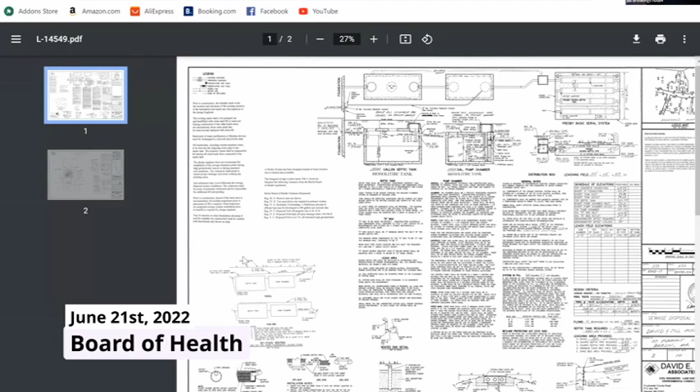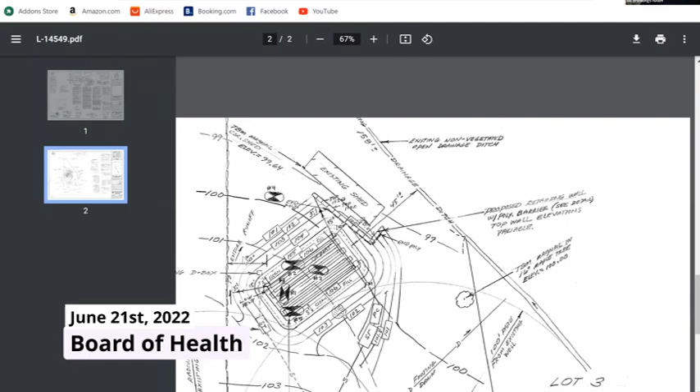So Sue, I think you've got the sheet. It's on the one shown. If you show sheet 2 of 2, we'll actually show the site. Oh yeah, there we go. Yeah, so 20 feet is proposed to the property line versus the 25 the local regs require, and 10 is the state's minimum offset.

Like another offset distance, leach area and tank off of, you can see that open drainage ditch kind of to the right of the plan. Leach area 45 feet and septic tank, probably a similar offset. It's basically dry, that ditch. Right, but again, the town has an offset to all open drainage. Yep. And this is the old offset.

So actually, this variance probably went away with the revisions. I think this letter was prepared prior to that change. I think the board went to 50 feet, which actually this would meet, and the state's offset, I think, is 10. Okay. And lastly, 5C, which is the groundwater offset.

This plan currently shows the Presby bed 4 feet above water table. Again, the town has revised their 5 feet to 4. So this meets the town's requirement, but there is a discussion of possibly lowering this to 2 foot, which is allowed by the Presby DEP approval. But again, the plan before us shows a 4. So that 5C actually isn't needed, but probably should be discussed in case a redesign is done. So that's the list. I don't know if there's any questions.

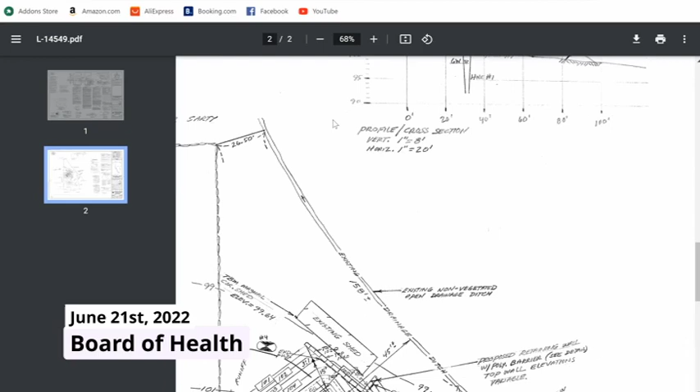So, does he have any comments, David? Do you have any comments? Okay, I think I'm unmuted now. Okay. Oh, here he is. Yeah. He hung up on us. I think you had him on there for a second. I did. And he's just on the phone, right? Correct. Yes, he was just on our phone, but he hung up. Can you hear me now? Yes, there he is. Go ahead. Hi, Steve. Sorry for the rough treatment. I've been pulling my hair out trying to figure out how to unmute myself. No, Bill, you did a wonderful job. Thanks, Stephen. Sorry I didn't pick up your call. I didn't recognize the number.

Okay. Yeah, you covered everything. Basically, I just wanted to go over the amended regulation. 5C is the groundwater offset. Typically, your board has always wanted the most extreme groundwater offset, so we've always asked for 4 foot, a reduction from 5 foot. However, talking to Bill the other day, he said Presby has now adopted regulations to allow a 2 foot groundwater offset instead of a 4 foot. I wanted to amend that regulation that we're asking for. If the board is uncomfortable with 2, even a 3 foot groundwater offset instead of the 4 foot would be a big improvement.

Okay. I'm not sure how many of these you've had with the 2 foot groundwater offset approved. Yeah, not many, I don't think. I can't think of a 2 foot offset, but that doesn't mean it hasn't happened. We could be the first. Yeah. That could be a double-edged sword. Right. So again, Title V requires a 4 foot groundwater offset. Even if we can get a local upgrade approval for the 3 foot groundwater offset, that's going to help this situation tremendously.

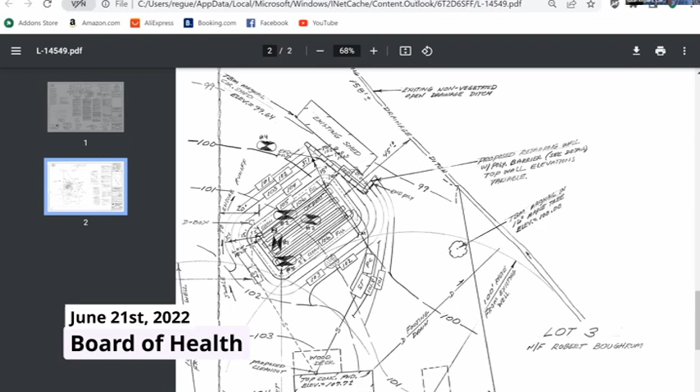Paul, where do you weigh in on this? I'd be a little more comfortable with the 3 foot offset. 2 foot, even though Presby allows it, we don't have any experience with that one. With 3, we'd be setting some precedent, but the new regulations allow it. With 2, I think we'd be pushing the envelope a little bit. So I'd like a 3, and that is a reduction, correct? Yes, it is. And it would make it a little nicer for them, for this system, for the installer, everybody. Any other concerns? Paul, Bill? No, a lot of these are tough situations, so we try and make the best we can out of them.

Then I'd like to make a motion to approve the requested variances with a 3-foot groundwater offset. I'll second that. Okay, all in favor? Sue? Aye. Bobby? Aye. Paul? Aye as well.

Motion passed. You guys are all set. Okay, thank you very much. What we'll do is we'll revise the plan and get copies back to Bill. Yeah. We'll double check with David and Jill regarding the shed removal, if that's going to happen, and I can incorporate that too in my revisions. Right. And then Bill can get the proper permit made out.

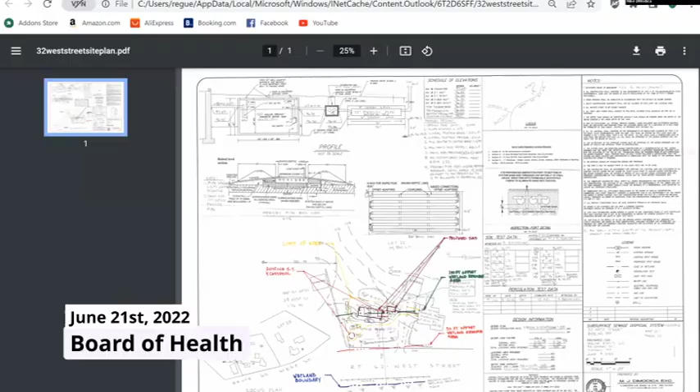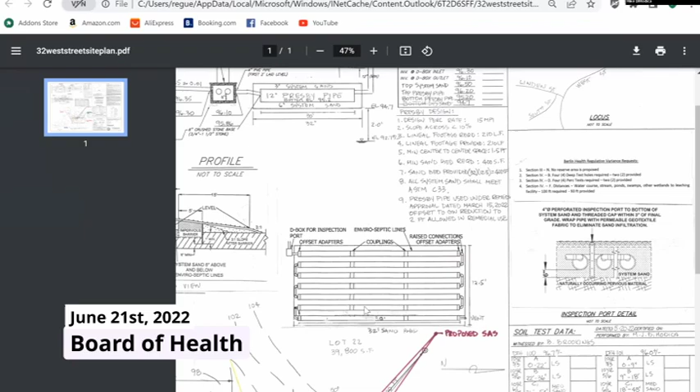It's 4B, which would be the deep test holes. We did 2 deep test holes in the primary area. Oh, great, thank you. And 4D perc tests, and then 4F distances. There is a wetland on the other side of West Street that we would be 93 feet away from. We are greater than 100 feet from all wells on site and at abutters as well.

And then the last item, which was not on the variance request, was 5C for offset to groundwater. We did as well design based on the March 15th, 2022 approval for Presby from the state for a 2-foot offset to the groundwater we observed on site. And the reason for that was the existing plumbing, we could do all of the work by gravity as opposed to having to put a pump chamber and a pump in.

If we were to have to go to 3 feet or 4, it definitely could not be done by gravity. 3 foot, I don't believe we could either, because the pipe is fairly shallow. It comes across the paved driveway from the dwelling and would go to the new septic tank. So I think that would be the extent of my presentation. You can kind of see the outline in magenta is the proposed septic area. So the Presby bed would be approximately 32 by 12.5. And a 1,500 gallon monolithic septic tank is proposed.

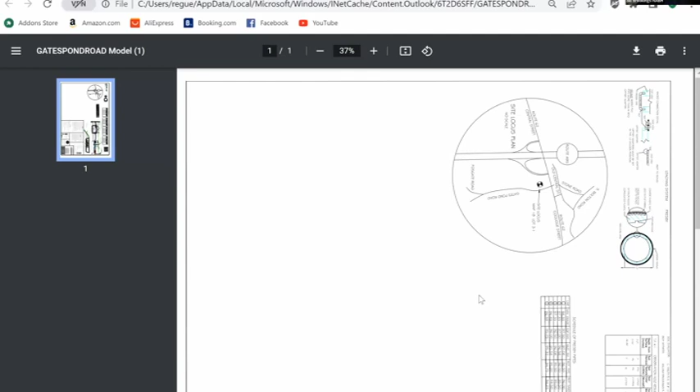No, before. Oh, before, okay, yeah. It's before Gates Pond Road then? Oh, yeah. It's adjacent to street number 56. Okay. What? Oh, this thing, hold on. I got to see if I can rotate. Oh, there you go. How's that? Now I know where it is. Yeah. Yeah. Oh, yeah.

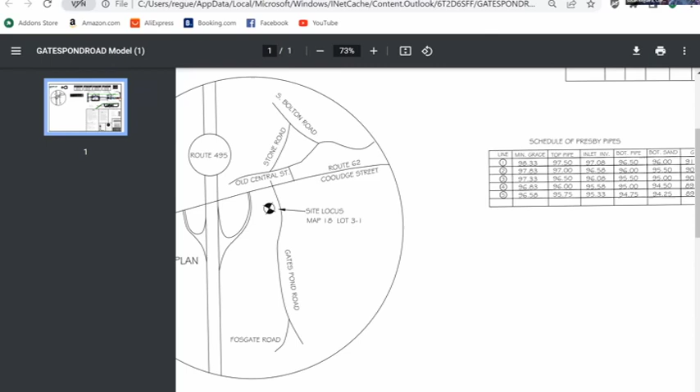So the next sheet should show the layout. That's up on the hill, huh, Bill? Now I have to go back. Yes. To the email and open up, they sent them separately. Here we go. Yep. So this is pretty straightforward. With the change in the regs, no variances needed. The only one that would have been needed would just be the time of year the testing was done.

We tested there. And this will be a gravity feed, Billy? By the looks. House on the hill, well actually further up the hill behind it. And you can see gravity to a 1,500 gallon tank. And then they're actually proposing a Presby bed. We were out there December 1st. Oh, geez. Now, this is right up adjacent to the one up on the hill that's there now, Billy, down a little further. Is that the idea? The little ranch that was up there?

I don't know that there's any houses up on this hill. The houses on Gates Pond when you first come in are all right near the street. Yeah, but there's one on the right. It's on the right, you said, right? Yeah, there's probably 2 or 3 houses. Oh, that first house is up on the hill. That's 11. Yeah, that one. It's between that one and the other one, or no. Then there's a few houses near the street, and then this lot, and then another 2 houses near the street. Yeah. And then you start approaching Fosgate. But again, it's cleared. If you go by there, you'll see.

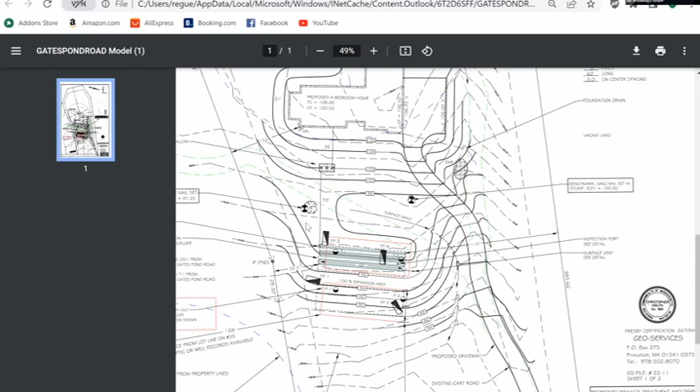Did I miss 40 Highland Street? Well, that was just a discussion of the hearing notices. There was an abutter that went to the town hall versus the Zoom meeting, and I've been playing phone tag with the abutter to come look at... Is that Donna? Yes. Yeah. Okay. That's why we're trying to schedule them out and identify whether it's Zoom or in person now, so there's no confusion going forward. All righty. And they're satisfied now, Billy, pretty much? I haven't caught up with them. Been playing phone tag for a couple of weeks, but again, left a message this morning that I'm there Tuesdays and Thursdays, or available other times by appointment to look at the plan and the variances.

Okay. You know, if there's a strong concern, I would invite them to a meeting. Right. That was pretty straightforward, that one. But again, an upgrade to an existing home. I think once explained, I've never had anyone have an issue, because what's going in the ground is better than what's there, big time. Yes, correct. I think sometimes the general public really kind of forgets that we're not trying to put anybody out of an existing house. And they get hung up on a wetlands thing or whatever, and understandably so. It's just that they're not real clear on what the whole situation is.